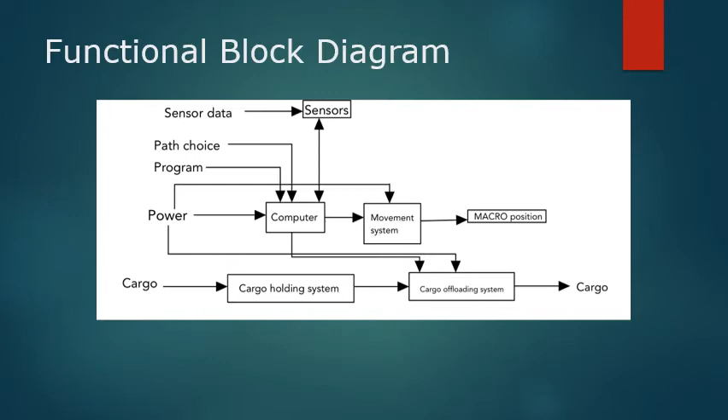In the early planning stages for the MACRO, it seemed that the cargo unloading mechanism would be the most complicated feature to implement, so that was the main focus of the brainstorming session. Ultimately, 4 design ideas were proposed for the final design, depicted in these figures. All 4 designs had nearly identical frames, wheel structures, and sensor placement, with the only difference being the method used to unload the cargo and the placement of that mechanism.

Design idea 1 involved a lift mechanism similar to a forklift, which would be attached to the rear of the MACRO. Design idea 2 featured a trapdoor device in the center of the MACRO, which would then drop the cargo and then drive over it.

Design idea 3 had a similar mechanism to design idea 2, but in this case the cargo holders would be placed on each side to allow for a lower height and even weight distribution. Lastly, design idea 4 was similar to a dump truck because it would tilt the cargo in a bed and then release the cargo so it would slide out.

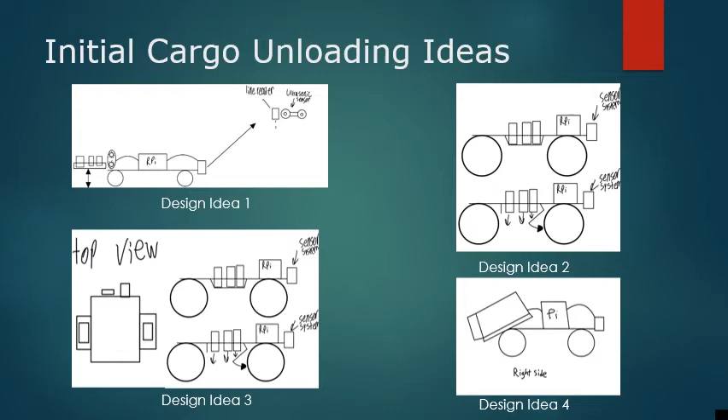A decision matrix was used to determine the optimal design for the cargo unloading mechanism. The designs were judged on 4 customer and technical needs. The MACRO could not be too tall, so this was measured by a maximum required height of the MACRO. Also, the MACRO had to be well balanced, which was measured by the ratio of the mechanism's radial distance from the center of the MACRO to the total length of the MACRO.

The MACRO had to be built in adequate time, so this was measured in estimated build time, and the design had to be simple, which was measured by the number of motors required. For all of these specifications, lower values were more desirable.

After all the estimates and calculations were put in the decision matrix, it was determined that design idea 1, the forklift mechanism, would be used. The main structure of the macro turned out to be simple to build, as seen on the right. It had front-wheel drive for ease with turning, 1 sensor on the front with room for more sensors, and space on the rear to place the cargo.

The initial cargo mechanism, however, proved to be a challenge. It was realized almost immediately that the forklift design would be much more complicated than it originally seemed, because a track would have to be constructed for the lift to move up and down, and gears would have to be placed very precisely to operate effectively.

As seen on the left, a modification was made to the design. Instead of having a lift that moved vertically, the structure could be used as a stationary platform with gears on the side, which would push a horizontal bar that would push the cargo off the platform. This, too, turned out to be very difficult to construct for mostly the same reason as the forklift. The track for the moving parts to go along would be very difficult to keep stable.

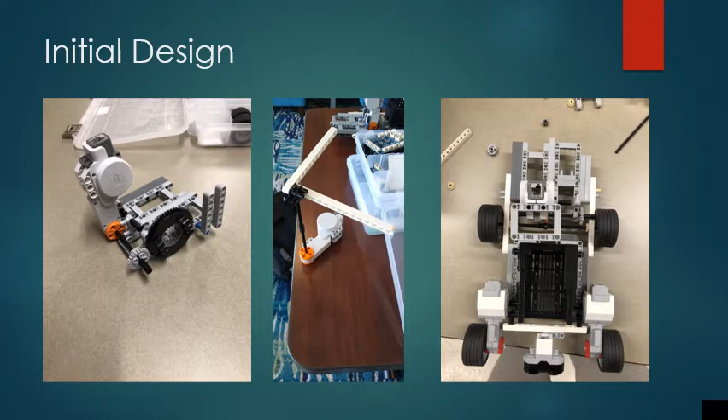As a result, an even simpler solution was developed as seen in the center. This unloading mechanism consisted of a shaft sticking vertically out of a motor, with two horizontal bars attached perpendicular to each other. Ideally, one bar would keep the cargo in place, and then when the macro reached the drop zone, the motor would spin and the second bar would push the cargo off the cargo platform.

After comparing the macro with the dimensions of the cargo, it was determined that a much larger cargo holding platform was needed. Additionally, after testing the cargo unloading function, it was observed that the spinning mechanism only needed one horizontal bar to hold the cargo in place and push it off, with a barrier added on the opposite side of the platform to guide the cargo straight off the back. A ramp was added to the rear of the platform to allow the cargo to slide down and land upright.

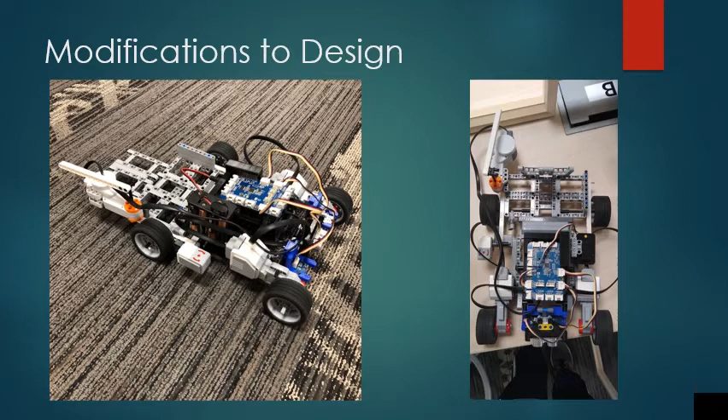Line finders were added to the front so the macro could follow the paths. A gyro sensor was added to the side to detect inclines, and an IMU was added to the other side to detect the magnet at the cargo drop zone. Several other features were experimented with. The macro had trouble getting over obstacles, so it was fitted with larger wheels and a gear system to increase its speed. However, the wheel size made it more difficult for the macro to turn, and the increased speed made the macro's line finding less efficient, so these changes were ultimately rejected.

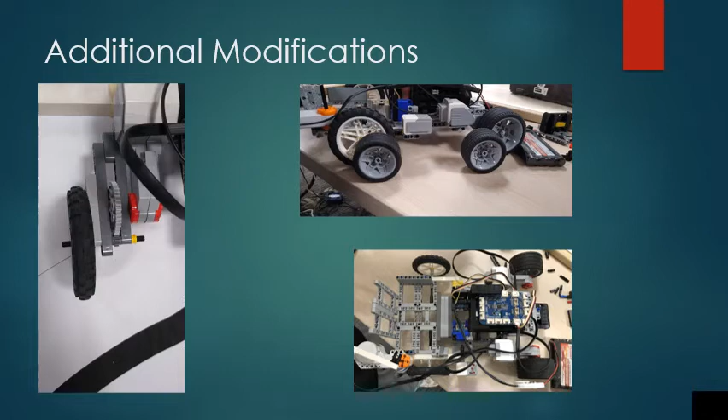The IMU was moved to the front of the macro to be in a better position to detect magnets, and the line finders were moved to the center because this allowed the macro to stay on the line better while turning. These changes were kept. The final design featured an IMU and ultrasonic sensor in the front and line finders in the center. These were the only sensors that were needed because the IMU functions as a gyro sensor as well as a magnetic field sensor. The macro had to sacrifice speed and power for maneuverability and ability to follow a line.

The cargo removal mechanism was simple but powerful and effective. The fact that the macro was very low to the ground and had trouble getting over obstacles was not ideal, but there had to be trade-offs. The final design was the best combination for efficiency and reliability.

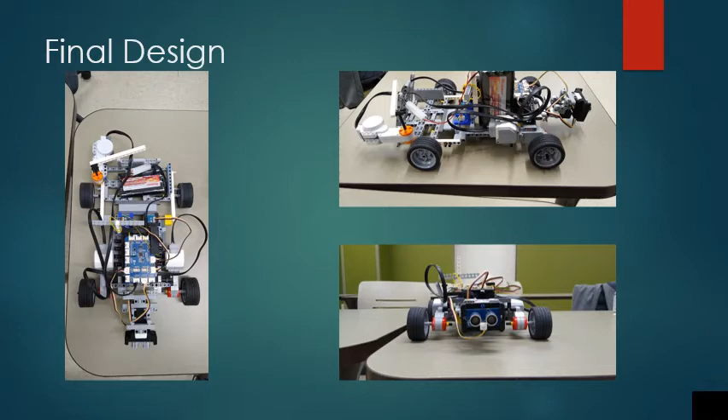The programming went through several developmental stages as well. In the design process of programming, it was vital to make sure that the robot could go over the obstacle, follow lines effectively, drop the cargo at the correct target, know what to do at intersections, keep the cargo stable on the robot, speed up on ramps, and stop when it gets back to the landing zone.

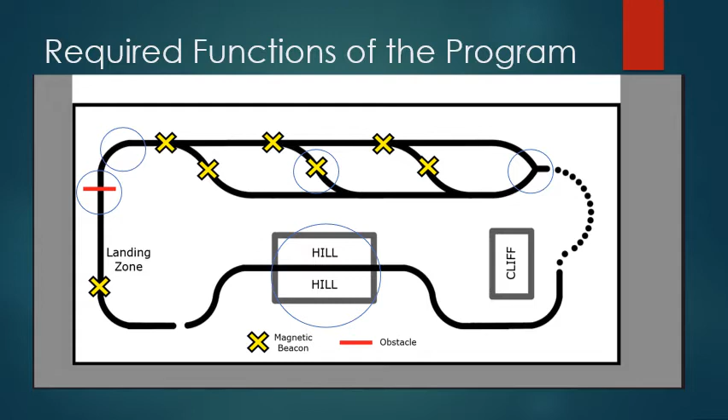In order to go over the obstacle, the robot had no mechanical advantage in passing over the obstacle at the cruising speed, so the code had to make the bot start off going at a high speed in order to have a chance at going over the obstacle. So the code first executes a command to run the motors at a very high speed, and the robot sleeps for about 2 seconds. And after these 2 seconds are over, the main loop is executed.

After this, the main periodic loop of the robot would start, and the robot would start following the lines. The robot follows the lines by turning left when the left line reader detects the black line, and it turns to the right when the right line reader is detecting the black line. It is set to do these turns stationary so that it could not accidentally go off course in the scenario where it is turning and moving, and it will also do these turns as quickly as possible so that time

is not wasted. So the code here says that a while loop will be executed while the left line is detected, and if both lines are detected, it will break out of the loop because a different command needs to be executed if both are detected, and at the very end, the direction it needs to turn is executed.

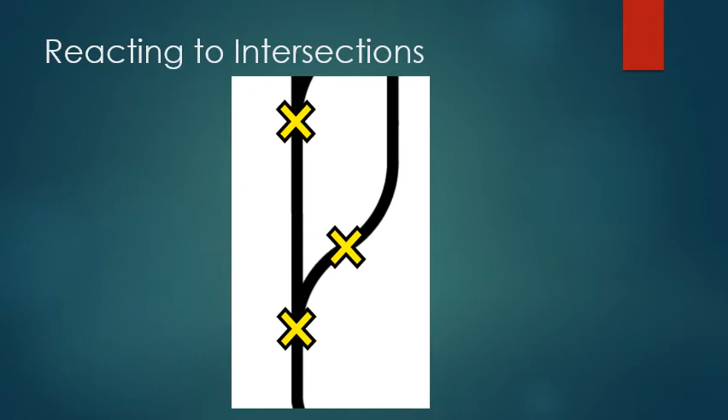It predetermines what target the robot has to go to, and all 6 possible targets are considered in the code. Whenever the robot comes to an intersection, it will iterate a variable that stores how many intersections have been encountered. A series of logic statements evaluate what to do depending on how many intersections have been encountered and what

the ultimate target is. So if the robot needs to go on the second target on the right, the robot knows that it must first go straight on the first intersection, right on the second intersection, left on the third intersection, straight on the fourth intersection, and right on the fifth intersection.

When the IMU unit detects the magnetic field of the magnet below the target, the code will start up the dropping mechanism, which will slowly push the cargo as the robot moves. As the robot was accelerating, the dropping mechanism would turn the other way to keep the object on the robot in case it slid out. And this is shown in a flowchart.

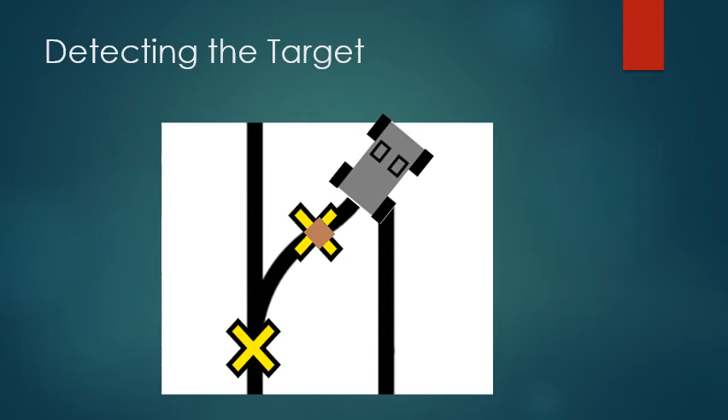Deploy cargo is a function that executes, and it sets a variable called magnet minimum to a value, and this is the minimum magnetic field to start the dropping process. And there is a decision that compares the current magnetic field detected to the desired magnetic field, and if the detected is greater, then it starts the dropping mechanism, and if it doesn't detect it, then the dropping mechanism is stopped.

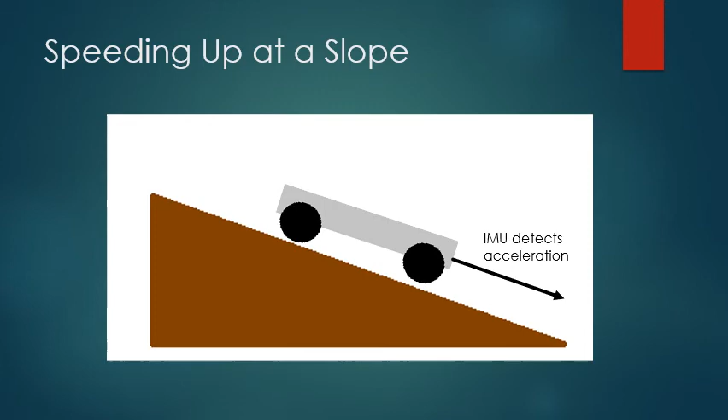When the robot came to a ramp, we detect changes in negative acceleration. And if a significant negative acceleration was occurring, it would speed up for that duration. And finally, when the robot returns to the landing zone, it will listen for the magnetic field, at which point it would stop and wait for cargo.

For both the robot's overall performance and design, there were positive and negative aspects. In terms of the positives, the main one would be the unloading mechanism. The cargo holding system was large enough and met all target values in order to individually carry each of the 3 types of cargo. The robot was able to maneuver around the practice course while carrying the cargo. The bot would not tip or turn any different despite carrying a large load in the back.

Throughout all the tests, the unloading system was able to deliver each of the 3 cargo objects within the desired radius of the drop zone. The cone, cylinder, and block were dropped upright and would slide a little but remain within the designated location. During testing, the bot could carry each individual object easily, and a max test mass of 475 grams was achieved, enough to carry the largest object.

Another positive of the bot was its ability to achieve a desired speed. By testing different powers for the motors, Team 17 was able to determine the speed of the robot at certain powers. The team measured how long in seconds it would take the bot to travel 150 centimeters. In doing so, the team was able to determine a trend between the speed of the bot and the power being used in the motors.

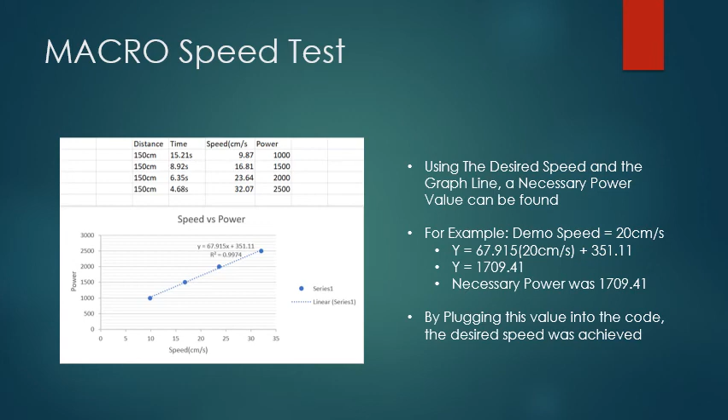By graphing this trend in Excel, the team was able to find an equation to represent the relationship between the motor power and the final speed. By plugging the desired speed into this equation, as shown in the example, the team was able to determine the necessary motor power for the speed run. By directly inputting this calculated motor value based on the desired speed into the straight line program, the robot was able to complete the speed test with great accuracy.

Since the line follower was not working right, the robot could not complete any of the tasks required of it on the map. The issue for this came from both the code and actual build of the robot. The code had issues following the dotted line, and the design itself was problematic on the turns. The code did not account for the change in pattern of the line or alter the speed or turn of the bot for the sensors to work together properly.

Therefore, the robot was forced into far smaller and jerkier motions, causing it to veer off course amidst its small alterations while attempting to realign itself. This resulted in the robot ultimately spinning in a circle slowly with sporadic movements. Although the bot was well equipped to successfully navigate over the obstacle and the hill, it only had a chance to attempt and complete the obstacle due to its problematic line following.

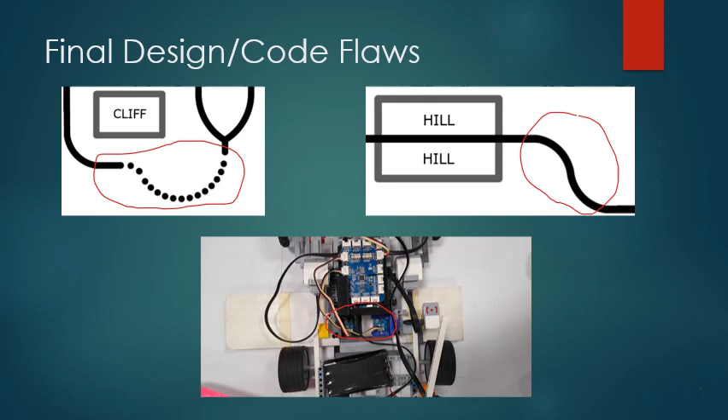During the preliminary tests, there seemed to be few problems with the robot and more positives about it. On test day, however, a few minor problems led to an overall negative performance. Team 17 was plagued with unfortunate circumstances due to the COVID-19 pandemic, leading to a disconnect between the build team and the code team. If there was any way to improve the macro, it would be time management. If the build process had started just a week earlier, development would be on track to fix the issues discovered during testing. The main area for improvement was the line finding and turning capability.

A previous iteration of the line finding was able to successfully navigate even a dotted curve. During the final demonstration, the macro would not be able to get itself back onto the line when making a turn, leaving it to turn slowly, aimlessly in a circle. The macro was able to perform any task individually, but due solely to the lack of turning capability, it was unable to perform any task correctly that involved turning. If the development had started earlier in order to allocate more time to testing and adjusting the macro, the performance during the demonstration would have been drastically different.

In order to fix the turning and line reading, the code would need to be revised, and the line reader should have been closer to the front of the macro rather than the center. Although individual components of the macro worked correctly, more time should have been spent on the turning capability to integrate all the functions together.